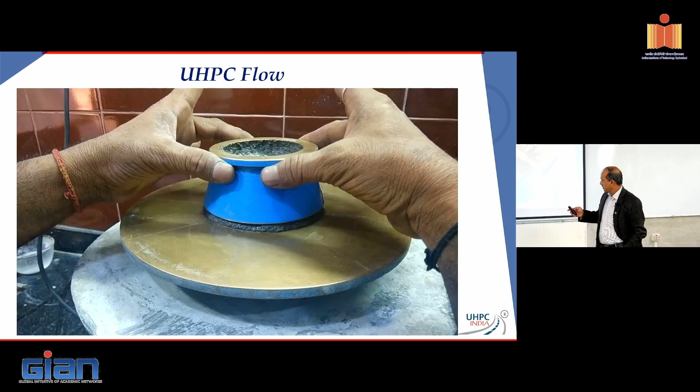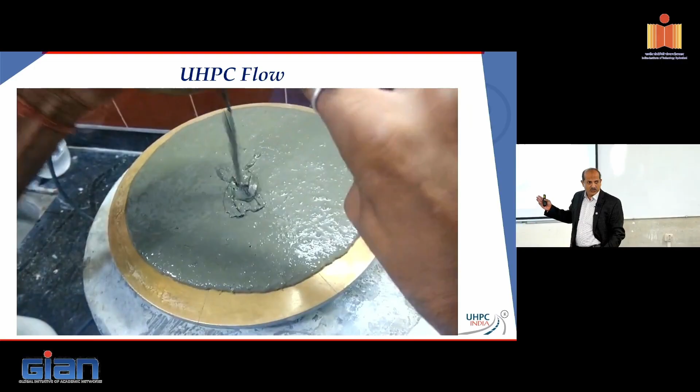And so it's a mortar. I don't like to call it concrete, although UHPC is ultra high performance concrete, but more or less it is a fibrous composite mortar. And that is what it is. And very, very flowable. I start this slide here showing a typical flow test on a UHPC. It can flow into any kind of mold, any shape that you desire, and it gives quite a bit of flexibility in that manner. You can see that over here, and this has fibers, an enormous amount of fibers. At least 2% by volume, which is about 156 kgs a cubic meter of very fine, microfine fibers in it. That's where it comes close to structural steel. It appears as liquid as it could be, and it could flow into any kind of system there is.

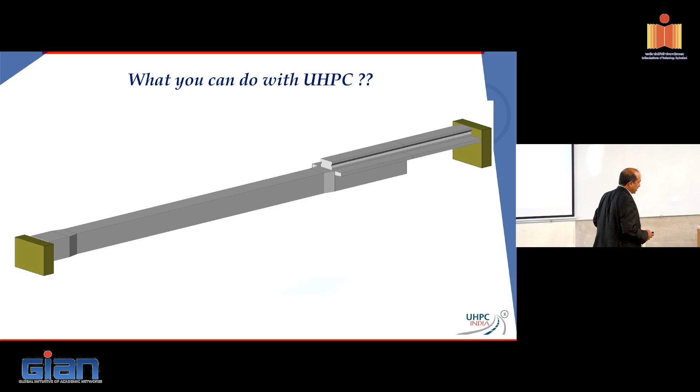I want to show you this shape. That is a beam, a 14-meter precast beam. This beam has come into that shape because of several architectural requirements and MEP requirements into a building project. I'll explore more into how we could solve this problem with UHPC, because we could come out with a section such as this. It had precast slabs as well, and I'll talk a little bit more about it later. I just wanted to impress upon the fact that while there are huge bridge girders made with UHPC today around the world, as sleek as a section this is for building purposes and long enough at 14 meters, how does this work? It could be made into this shape and size as it is. So we'll come to this, but that's the beauty we're talking about.

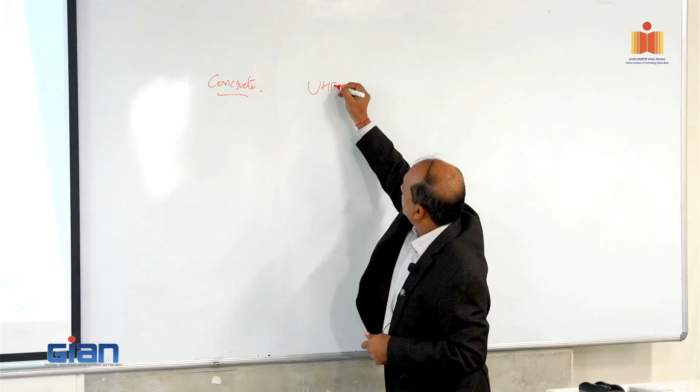If I take concrete and UHPC side by side, I'm going to put some numbers over here in terms of compressive strength: 50 MPa right there, and 150 MPa right there.

Typically, you would say I get two-thirds of my initial compressive strength, and I can do my post-tensioning or pre-stressing, I can release my pre-stressing. So I'll put some numbers over here. Initial, at the jacking force, you need about 30 MPa right there. Here, to take advantage of...

UHPC gains early strength, so in 3 days or so you would have 100 MPa right over there. And when you have this, your initial pre-stressing stress that you put is probably about 60% at max. So if you put 0.6 of this FCK, you're limited to about 18 MPa at the initial phase. Whereas 0.6 of UHPC is 60 MPa.

So you realize that you can put additional pre-stressing into UHPC. Of course, there are other areas to be looked at in terms of design, but you could go high in terms of initial stress, and therefore you could go longer, leaner as well. That's why I mentioned pre-stressing is a great friend of UHPC when it comes to long span construction.

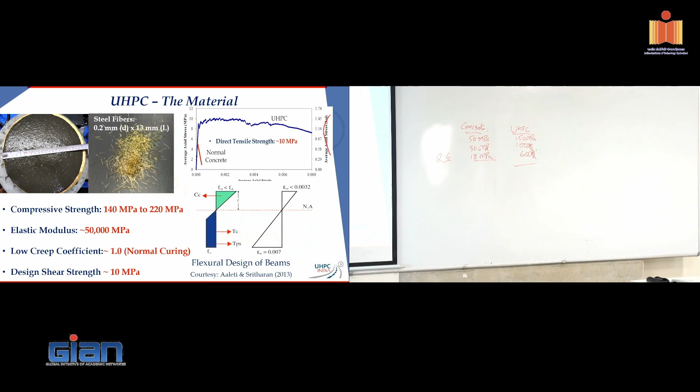So this is where the advantage in flexural members comes in. When it comes to pure compression members such as a column, it's a very direct advantage in terms of what you can use. You have a 50 MPa column versus a 150 MPa column, you're going to get a reduction in size, and there's nothing else to look at. So that's a very direct advantage.

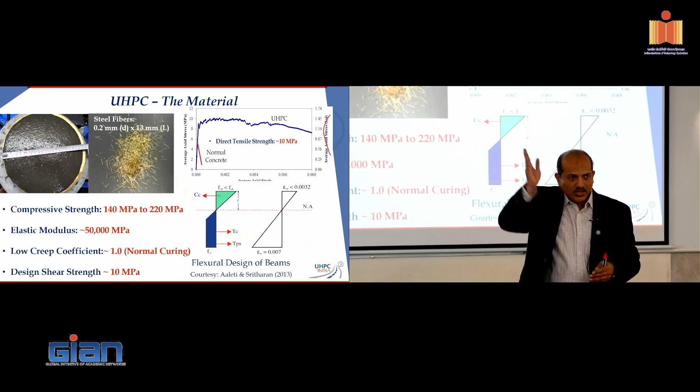Elastic modulus is generally high. It's not following the same route as concrete because it doesn't have coarse aggregate. At some point, you're going to be right over there in typical construction level UHPC. Now, when I say that, that number is not limited to that. There are some special purpose UHPCs out there that can reach 75 GPa or 80 GPa in terms of elastic modulus, but those are not typically used in construction.

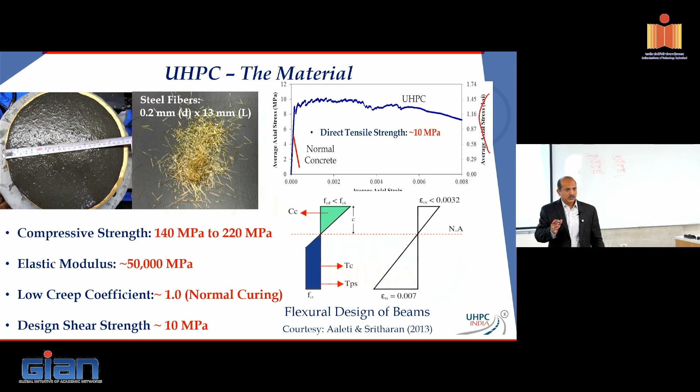Your creep itself is lower because the way UHPC is designed as a mix, your particle packing is really, really tight. That is one of the fundamental bases of UHPC. Apart from good quality raw materials and all, the one big fundamental of UHPC is your particle packing has to be so tight that your voids are lower.

And so your creep automatically goes down. With normal curing, you're probably going to be at a creep coefficient of 1 or 1.1 as compared to 2 or 2.2, which is there for concrete. If you go ahead and steam cure your UHPC for 48 hours at 90 degrees Celsius, it is possible to reach numbers as low as 0.2, 0.3. That's getting to almost nothing, and it's pretty much acting like structural steel.

So that is an advantage you can get out of steam curing, but then steam curing is expensive as well, you're putting in energy. In today's world of sustainability, green, low carbon, and all of that, putting 48 hours of energy into UHPC steam curing kind of works against that, although it helps in certain manners. 90 degrees centigrade is pretty high out there.

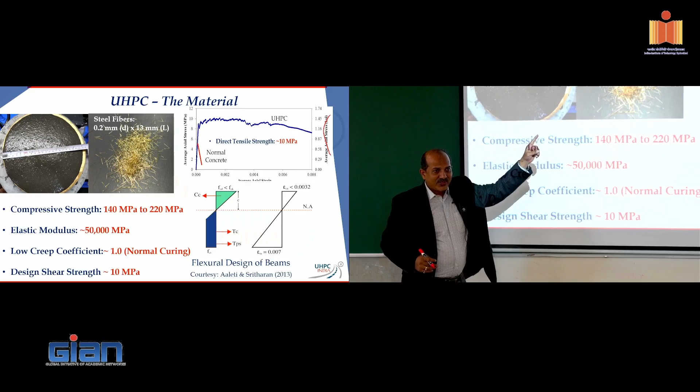And the same strain hardening behavior that you see right at the top over there helps in improvising the shear behavior tremendously, even without rebar. Now, if you look at your concrete code with concrete plus rebar, your tau C max is about 4 MPa. But here, if you look at it, just the design shear strength out of fibrous UHPC is right at about 10 MPa.

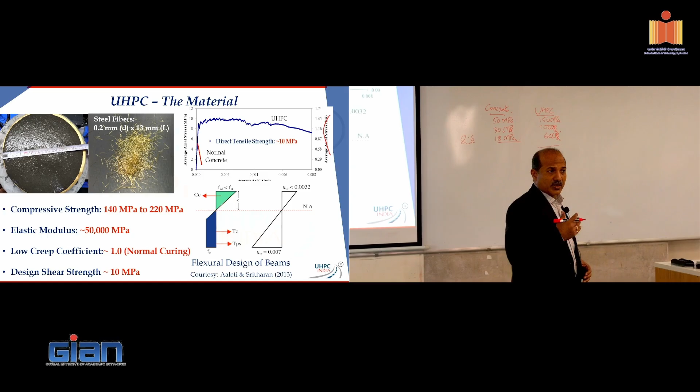So you can have more going for it, you can get 2.5 to 3 times the shear capacity out of that. And that is why, if I go back to the previous slide, I can carve out the rectangle so that all you need is a small web in between, and that is where your flexural members out of UHPC become way, way lighter.

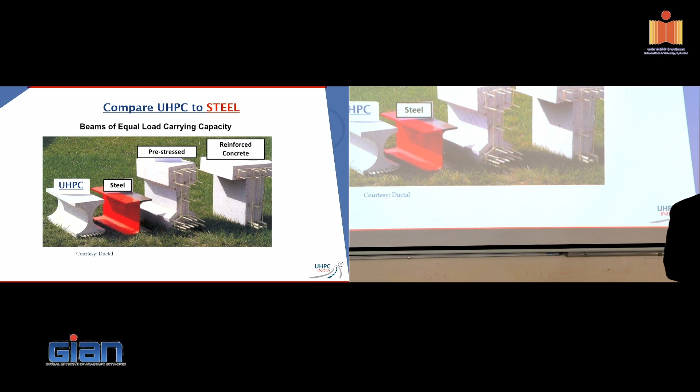I hope at least this slide, by all accounts, is clear.

For structural designers, one more thing: your compression curve is no longer parabolic. It's pretty much more or less triangular in nature, and the way you design a continuous UHPC member is a little bit on the reverse side. When you design concrete, you start right from the concrete strain of 0.0035, and then calculate the strain in your rebar or pre-stressing and go ahead with it.

In UHPC, what you do is work your way up to the strain localization point. Although here I've stated 0.007 — those were the early days. The 0.007, nowadays, for the last couple of years, I've seen this number being reduced to 0.005. But you start from here and do your calculations backwards.

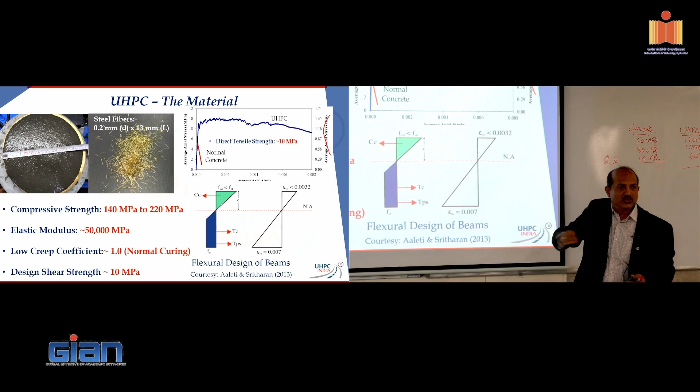So that is why you're using a full stress block of UHPC below your neutral axis. Your design starts from here, and then you figure out. Therefore, I've said strain less than 0.0032 — it is not equal to 0.0035, right? So that's the philosophy right there in terms of what UHPC is all about.

And that is why you can get sleeker members, and because it is flowable, you can put it in any kind of shape that you want. Because today with computer programs, you can analyze any kind of shape. It's very easy — not that you cannot do it by hand, but hand could take a lot of time. You can come up with a variety of shapes and do your analysis pretty fast. You do a section analysis, and your results come out very, very fast.

After all those years, this curve has been there for a long, long time. Then we saw a similar curve. I was at IIT Roorkee and saw a very similar curve, which was pretty straight. You did the test for us — Dr. Sri Prakash here did the test for us 3 years back, maybe 4 years back. It was also pretty straight in that sense.

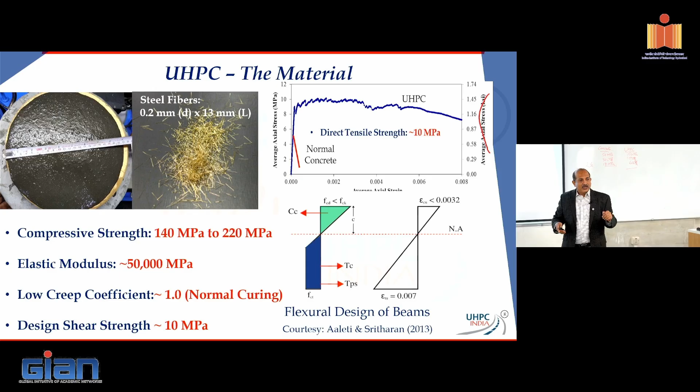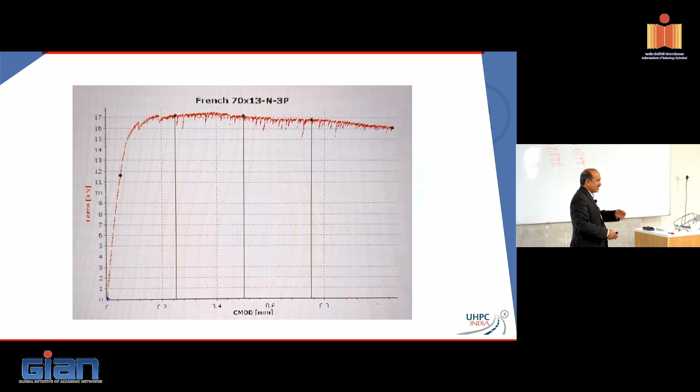Now we have a nice displacement-based machine that's been set up, so I just thought I would do a test out there. This is per the French code, and you can see we are getting a very straight behavior out of it also. At least there are 3 or 4 examples back at Iowa State University. All the tests done with 2% fibers are pretty straight, rather than having an increasing strain hardening curve. So these are multiple confirmations that with 2% steel fibers, you are pretty much almost flat on your curve right there.

So what happens if you just have 1% steel fibers? With 1% steel fibers, I think it's going to be more like a strain softening curve rather than strain hardening. Your strain localization happens pretty fast. I don't know what's your take on it — that's what I've seen. Yeah, well, you need to have at least 1.5–2%, then only you get that hardening behavior.

On durability, what happens to corrosion? Because the material is so tight, the particle packing is so tight, it's automatically protected — that's why it's called ultra-high performance concrete and not ultra-high strength concrete. If it was just about strength, we'd have just called it ultra-high strength concrete. But when you look at oxygen permeability, chloride ion penetration, reinforcement corrosion rate, or carbonation rate, comparing concrete versus high-performance concrete versus UHPC — UHPC is here in blue, and it's next to nothing.

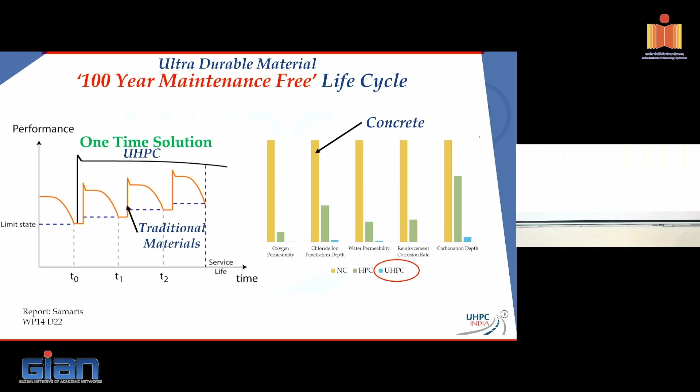I think there are three or four parameters. The first is strength - minimum compressive strength, which different codes define at different times, but strength of 120 is generally accepted. The second is flowability - we do a mini flow test, it should flow with no external compaction required. The third is the durability requirement, typically measured in terms of RCPT. And the fourth, I would add, is the post-peak tensile property, the strain hardening behavior, typically 5.5 or 6. So these are the key differentiators as far as the material is concerned - it's more a mortar than a concrete in that sense.

So I would now like to take you to the first UHPC project in India and how that came up. I had worked with a cable company some 10-12 years back, so I was able to interact with their managing director quite a bit. It so happens that at least in India, people know of ISKCON - they are big donors to ISKCON and are associated with them.

One fine day, while we were actually looking for projects in UHPC - now that the material was developed and everything was done, and we were trying to get our first project - I got a call out of the blue: 'Satish, we have a case where the building is up, it's G+2, for ISKCON, we are doing a training center in a tribal area. It's a G+2 building, the terrace, the last floor - we do not want internal columns. Instead of 7 meters, we want 14 meter spans.'

I said, okay, I have an idea what I could do for you. So I met him the next day, and this was part of a bigger structure, but they had these internal small columns. We cannot structurally justify this - there was somebody involved, a structural engineer, at some level on the interior areas. But these columns were removed, and what we did is we placed these 14 meter UHPC beams.

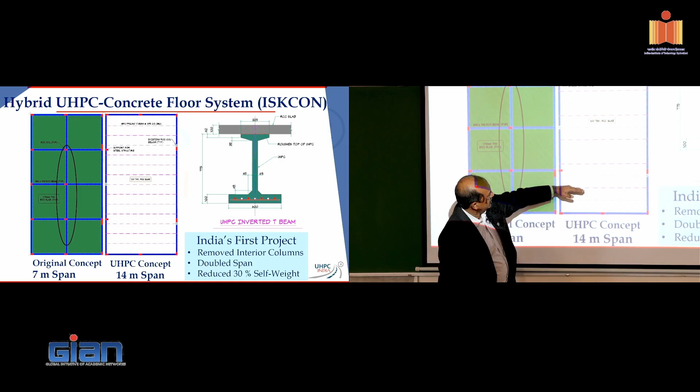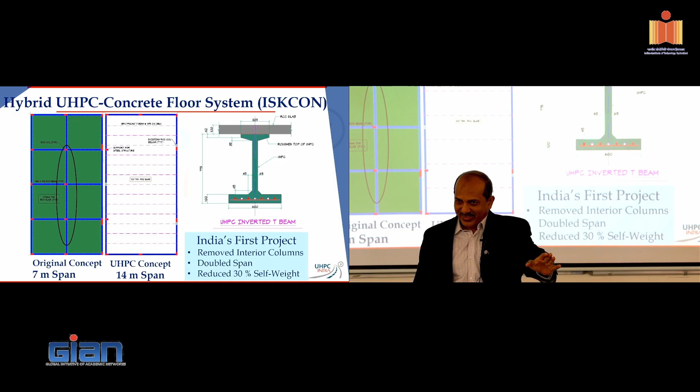They were extremely thin, unbonded post-tensioned beams, with about 3 strands in there. Since this was the first time we were doing something like that, we additionally put in 4 rebars as well, just for safety purposes, nothing more than that. We had enough capacity in there, but we didn't want to take any chance, so we added 4 rebars and had a very thin web - this green thing is what you see.

Now, they decided they were going to do a cast-in-place slab at that point. We said, fine, it's a good step - you're getting what you need, I can give you a 14 meter clear span. And that is how this started.

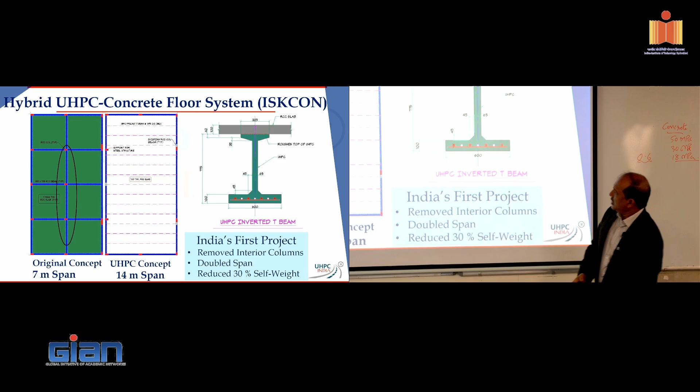So even after doing that, with the slab and these beams, the overall reduction on these columns compared to the original design was 30% - we reduced the loads from what was supposed to be with the 7 meter spans. There were just about 13 or 14 beams that were cast. Let me show you some pictures of it.

We did some other interesting stuff with it - those are the UHPC beams up there. I'll show you something interesting we did. Now, the major thing was, what do we do with the encapsulation of the anchors right over there?

We said, okay, we're going to try two tricks. Number one, we got everything highly galvanized - the barrel anchor and other components. Second, we opened up this end right over here, and this entire region was poured again with UHPC, because UHPC is a highly durable material as such - this is the extra protection we provided. So we did not use any grout for closing up the stressing end, but used UHPC to close up that end.

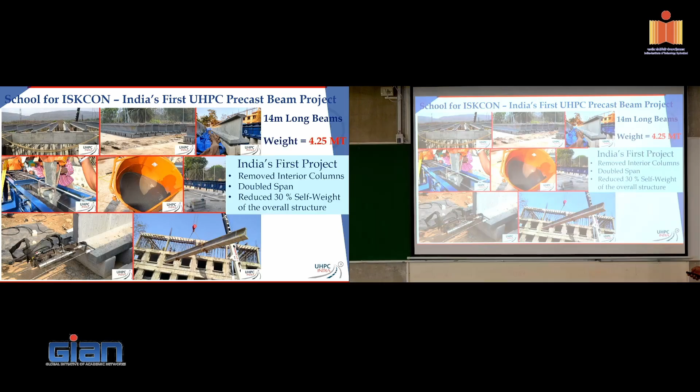So you can see the formwork right over there. This was precast on the site itself, and then was lifted up as you see. Weight of the members was just about 4.25 metric tons each.

I just want to show you, because this is for memories, this is India's very first beam that is being casted in UHPC. So I keep this video all the time, the very, very first one.

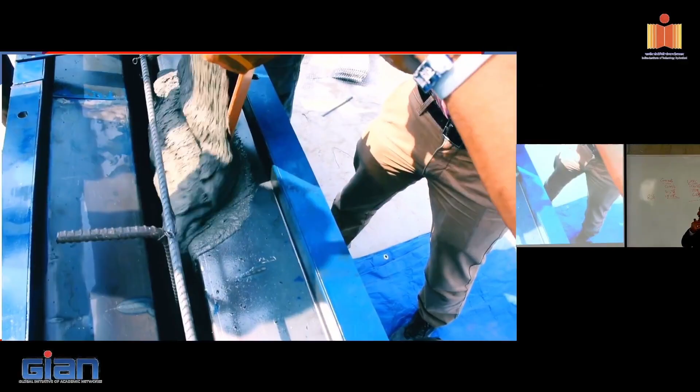You can see that material is flowing. What were the challenges? We were working in a 40 degrees temperature environment outside. That was the biggest challenge.

The first time we mixed UHPC outside, we immediately figured out that we need to take control. Although we were mixing ice and everything, it was fully iced, but we learned a trick immediately: before we start the mixer, we should cool down the mixer by putting ice in it, just ice. You run it for 5-10 minutes with quite a bit of ice, cool down the mixer in that environment, and then start mixing UHPC. It's going to have a very positive effect. So that is something we learned from the site, doing the first project in a 40 degrees centigrade environment.

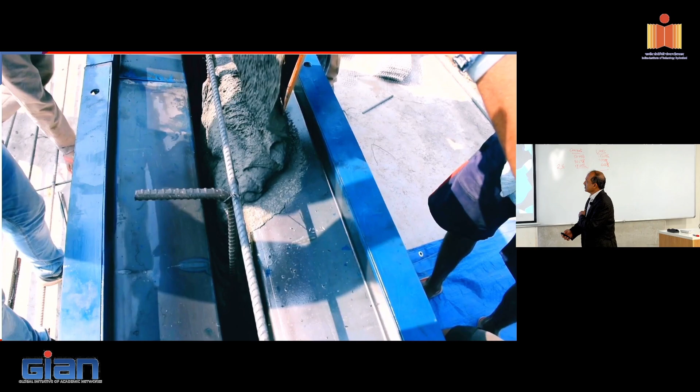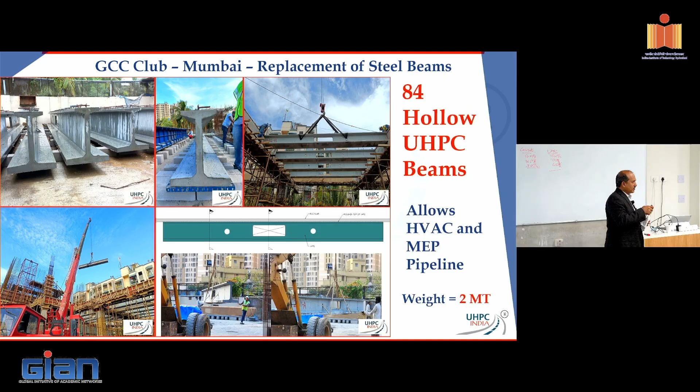Right there, if you could see it in the picture, there was an access hole provided for stressing it. But you were able to pump UHPC? Yeah, so we created a little formwork that could attach and we could pour UHPC in there. And this is unbonded post-tensioning. Yes.

Just because I've worked so much in the US and have designed a lot of unbonded PT for multi-story buildings, there's a comfort level in designing unbonded. There was no problem in anchorage, no bursting or any issue, nothing happened.

I was so nervous, that was the first UHPC beam being done with such a thin flange. I know what care we took when the first one was being done. I was standing nearby and was extremely nervous what was going to happen. So we did 50% stressing first, then went back and did the rest of the 50% stressing. Nothing happened, all the beams went well.

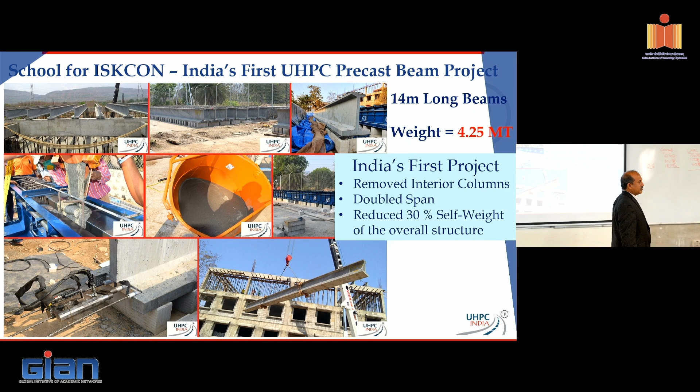Did you also use mechanical anchors, or just the UHPC? Mechanical anchors plus the UHPC. The reason Professor Sri is asking that question is my entire PhD work is on UHPC anchorages without the use of mechanical anchors. But yeah, we use the mechanical anchors right over here too.

So this one was deeper, about 775, it was thin and deep. We didn't have any constraints with respect to that. We could come out thinner and deeper, or shallower and wider. It really depends on what is acceptable on the site, what works, what's most efficient, economical, and what the parameters are.

Could we have done that in 600 mm? Probably yes, we probably would have had to put more post-tensioning in it, and this would probably have been thicker. The web might have been slightly wider than what we had. So it's just a matter of what is more pertinent to that particular project at that particular time. Okay.

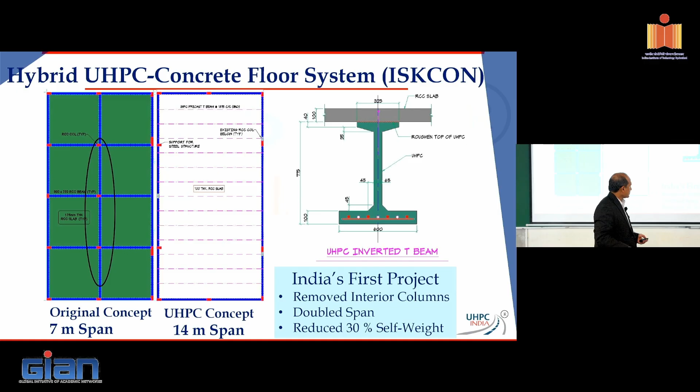So for curing, as I mentioned, steam curing is one way. Last model, what's the significance of that hollow portion? Oh, that was for AC ducts to go through. So when they have the ceiling, they don't have to put the air conditioning ducts below the beams, which eats up more space. It went through that, and the ceiling is right along the bottom flange.

Do we get any design advantage with that hollow? Usually at the center, the shear is almost zero, that's why we were able to do that right at the center point. Plus it's a little bit wider, that was a concern, therefore we ran some nonlinear failure analyses also to check it out, what behavior we are getting from it.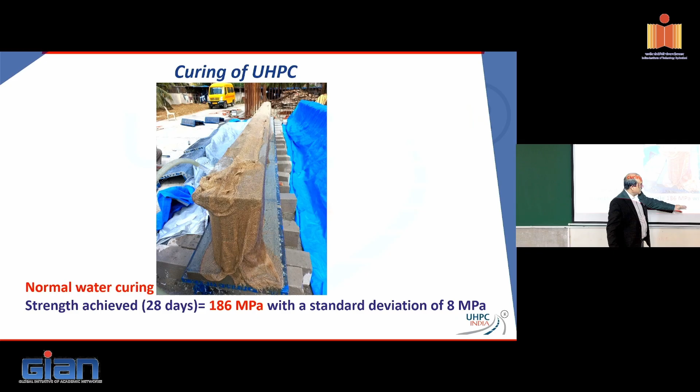But like I mentioned, you can do water curing. I'll tell you, this is with water curing, about 84 members cast over 30 days time. The mean strength was about 186 MPa on site, with a standard deviation of about 8 MPa. That is what we achieved.

Whenever you are measuring these strengths, are you using standard cubes or 100mm cubes? 100mm cubes, yes, smaller cubes.

Sir, why do we have a higher standard deviation? Does that depend on the strength of the concrete? Yeah, with normal concrete you might not want to see an 8 MPa standard deviation, but when you're talking of strengths in the range of 150 to 200 MPa, that number is not big, given all the material is getting homogeneous.

So why do we expect as much? See, there are other parameters, it's probably not just about the materials. Even if you get the best IS molds out there, there are so many situations on site, how the person is putting things in there. Are you getting a perfectly 90 degree angle on the cube? Are all your levels of the cube really flush, that you don't need to grind anything at all? So there are certain other parameters that come into place, and so those standard deviations are going to be slightly off.

If you want to develop a mix for 120, 150, 180 or 200, are there any standard ranges or standard deviation I have to use? I think we are putting a number in the IRC right now. From whatever I'm collecting from Satyasilan and other data, the standard deviation is anywhere from 5 to 8. But the French code asks you to take like 10 megapascal characteristic, because you can easily reach that 9, 10.

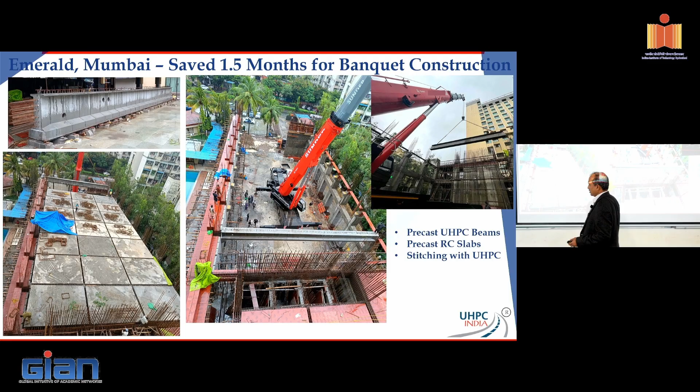Now this is another project. I'm just trying to show you what things are possible. There's another project about a 16-meter UHPC beam, but the beauty here was to construct it faster. This was about 10 meters high, so how to push construction on site. RC panels of about 4 meters by 5 meters were cast and put on top.

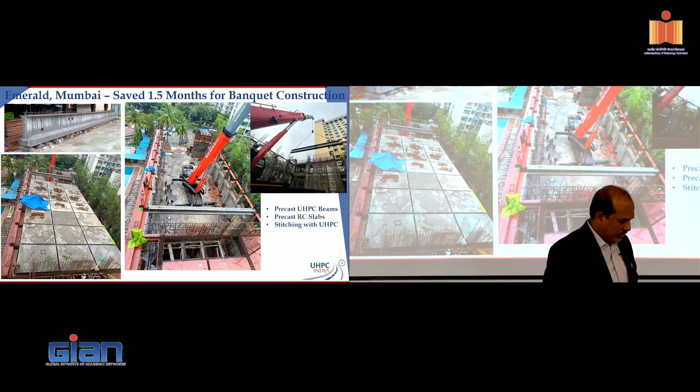Now, stitching with UHPC, I'm going to spend some time on it again. The beams were first placed, and then these panels were placed. The girders are right over here, the girders are right over there. Then UHPC was poured into these joints and all the connections were done. The project was able to move forward really fast in that sense.

So I don't like to claim it like that, but I still put this. We're trying to do a building in Mumbai. It's about 220 meters high right there, and it's currently about 8 or 9 levels up. But we're trying to see, I'll tell you what we have tried to achieve with UHPC.

Number one, I made a statement that you don't want to do a full building with UHPC. It's not going to be economically viable. We wanted to find out where UHPC is going to help, if it is going to add any value to the project.

So the total amount of UHPC on this project, in terms of overall concrete volume, is just about 12%. That is where the break even on the costing was for the building as well. The entire UHPC is just about 12% of the total concrete, including the foundation and the basement walls and everything else.

Now this is a commercial building, about 2 basements plus 56 stories, so about 58 stories high. To the top of the terrace is about 210 meters, with another 8-10 meters above that for architectural elements. It's a hybrid construction, so the core walls are cast in place going up, whereas the floor system is a precast system.

One more thing to understand is these are all pre-tensioned slabs - precast, pre-tensioned slabs which we are stitching together with UHPC. Generally when you do a precast building, like a hollow core building, you have the hollow core units butting against each other, and therefore you need a screed over it of about 3 inches to create a continuous diaphragm system that connects through all the shear walls, etc.

By doing this joint, we were able to avoid that 3 inches of screed because you have a monolithic construction in place and the diaphragm automatically gets created. So the load on the structure was reduced, and one additional floor placing, concrete placing activity throughout was taken off.

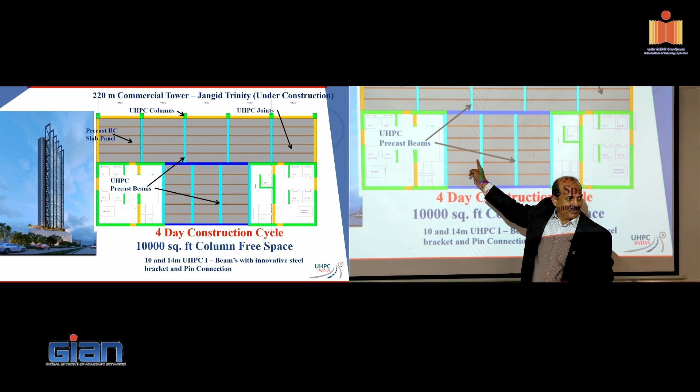Now let me show that beam again. You see some wings over here, right? Why was that necessary? Because we did not want to shore up the slabs. The slab needs to just sit on top of the beam, and if the slab sits on top of the beam, you're done basically, and that should work out.

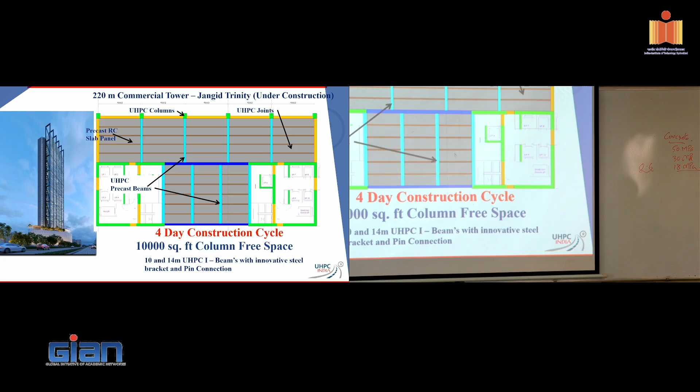We had a situation where if the slab sits on top of the beam, I would just have a beam of 100 mm, which is just not possible. I cannot have a slab of 200 mm and a beam of 100 mm - that is just not possible. So we needed to figure out a way to create connections out there.

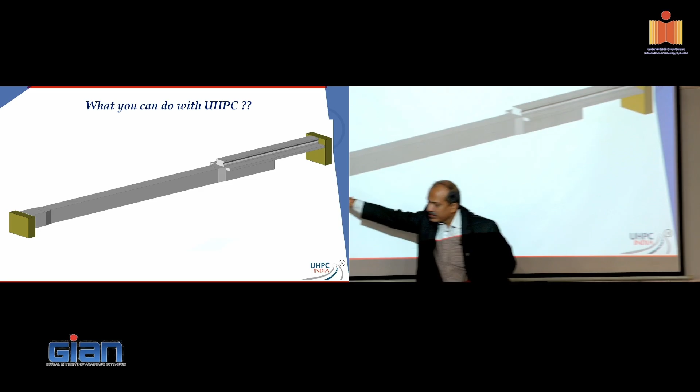So what we did - I'm going to show you sections starting here at the corridor area, then sections here, and right at the end. But before that, let me show you the design detailing of the beam, including the post-tension detailing that went into that particular design. I'll also show you the connection we did here at the far end - it was a pinned connection created with the beam out there.

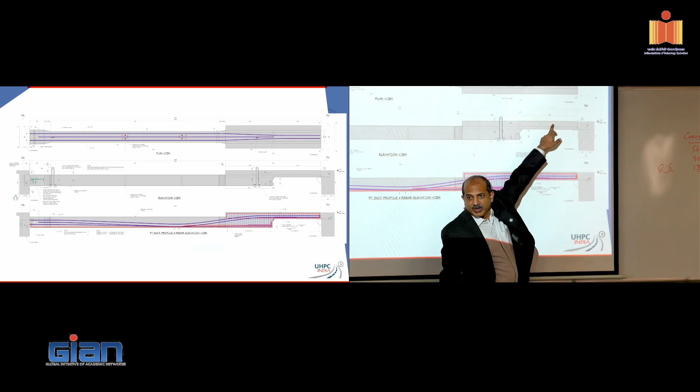We wanted to maintain the UHPC at 300 mm and not have the slab over there, although the slab still needed to be self-supported over the beam. So this is how it looked - that's a top plan, and these are both the side views over there.

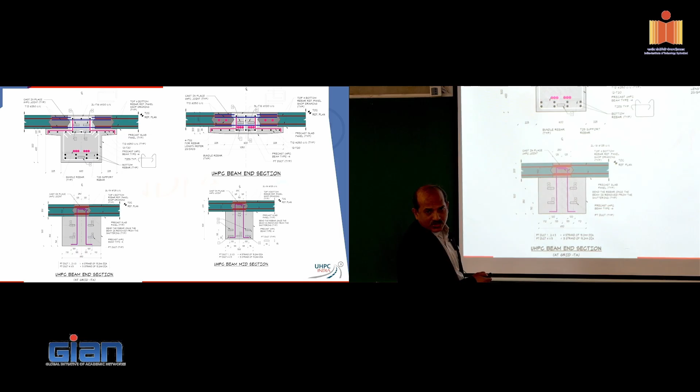That's at the corridor, so you see the wings over here. The slab comes and bears on the wings, and then you have a jointed connection right over there, with additional rebars etc. creating connections to the beam going right in. So this is a fully connected beam section to the cross beam over there.

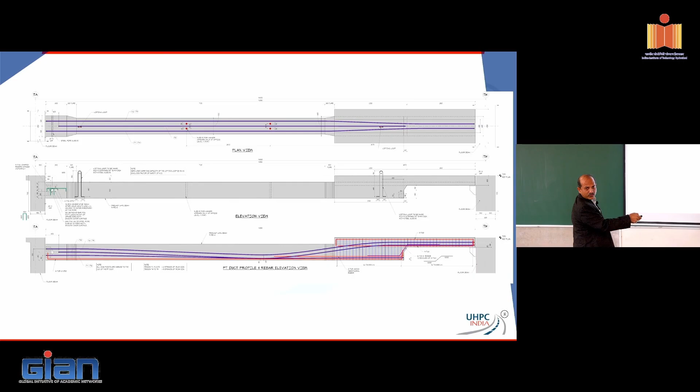This portion was extended out because we needed a transition zone over here. At that transition zone, the wings are still there - you still have the slabs bearing over the wings, and you have the stitch connection happening right there.

Then we move on to the most typical section inside, which is a 500 by 500 section right at the center, still stitch connected to the slabs. And right at the end, where the anchorages are, we needed a wider section - so you have this, with a similar connection right over there.

At the end of the day, we do not have to shore up any slabs in those areas, because that would cause a constructability challenge, and we do not want any constructability challenge. But there are times when you sit down and a project has to work like a team, so you have to accommodate all scenarios - whether it's the MEP, architecture, and the structure coming together.

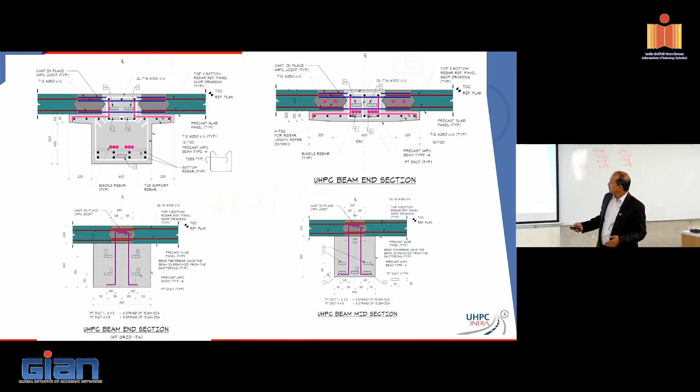At the far end where the pinned connection was, let me come back to that. This pinned connection right at that end is designed with a steel embed plate with headed studs inside the beam. There are some detailings of how that went about.

As the building is getting constructed, we have these at some other locations as well, carrying along on that building. What I wanted to show with this is that with UHPC, there is a way to do things without dumping a column at every other point. It was very important for us not to introduce other gravity columns down the middle, because we wanted that gravity load to go to the core, since the building is slender, tall, and seeing a lot of wind force, with tensile stresses in the shear wall. We wanted as much gravity force as possible to go into the shear wall. We tried to do that.

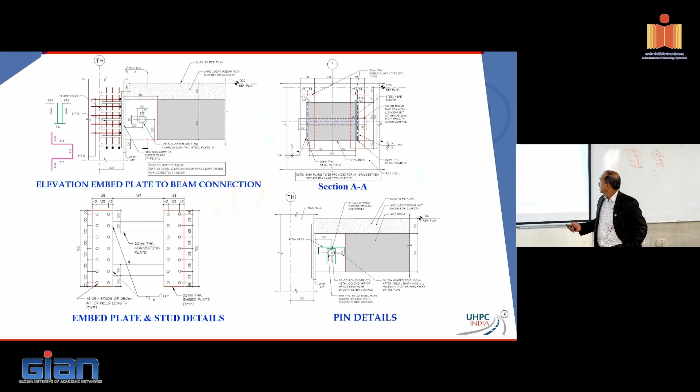But were you able to meet the tolerances? Because even in steel, the embedded plate is especially particular. So we kept tolerances on the sizes of the embed plates and headed studs, so that most of the time you don't get complaints that they're not matching. We kept decent tolerances out there, knowing upfront that these kinds of challenges were going to come, so good amounts of tolerance were provided in those connections.

I would like to show this. This is something typical you've seen, but also with the shear walls, we were able to provide a stitch connection right at the end with the shear walls. This is the slab to shear wall connections.

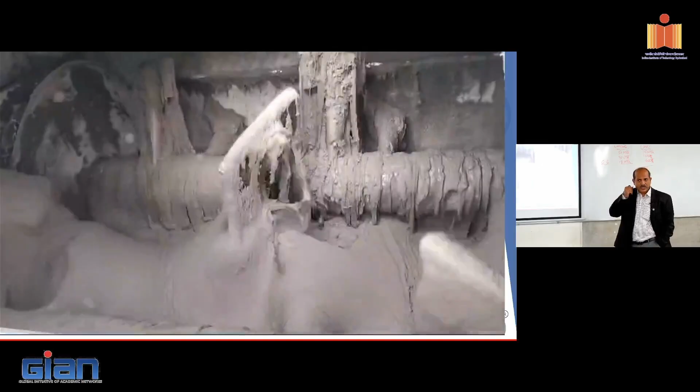I'll come to the connections, but before that, I want to show there is a nice 3 cubic meter twin shaft mixer on site in which UHPC is made and delivered, whether cast in place or to the precast formwork. This is casting of one of the rectangular beams, sideways, but you can see the flowability of the UHPC, so you do not need to vibrate.

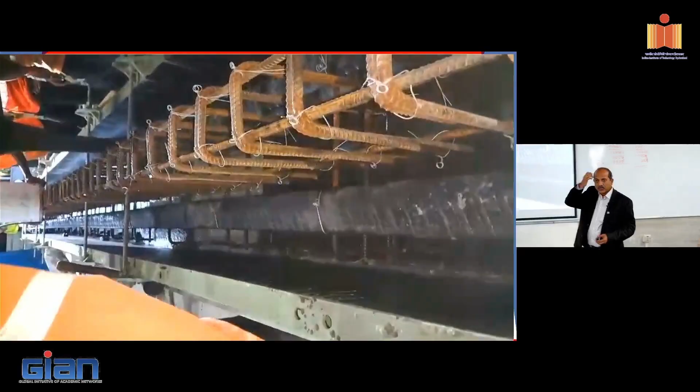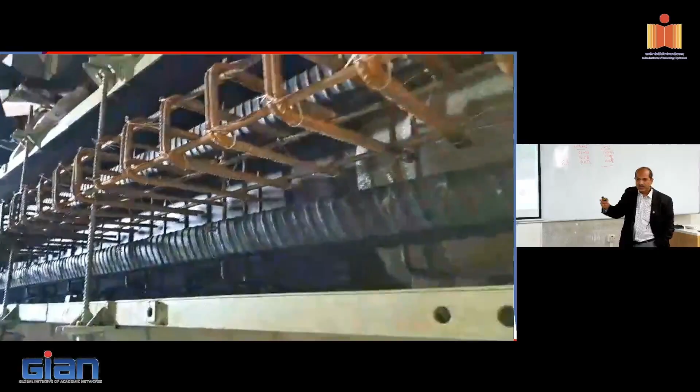Now the question comes, what happens if I do vibrate? I generally say please do not vibrate. If you want to do some hammering, just touch and go from the outside, that's fine, but if you do continuous vibration, there's a tendency for the steel fibers to align in one direction. You want the steel fibers to be randomly distributed, so there's no point in vibrating. You can see here the UHPC is just flowing inside the formwork, so you don't need to do any vibration at all.

Now these are the precast slabs out on the project. A complete precasting, or pre-tensioning, system has been put into place. That's one of the 14-meter rectangular beams on site, hanging. This is the 19-meter beam.

All right, Dr. Shri, yeah. Hope to catch up with you soon. Yeah.

So I mentioned about the concrete beams that were in 3 pieces, because it's not like a bridge project where you have a mega crane that can come in. Building projects have limitations on crane capacities and sizes, especially when going that tall, so we needed to work within those limits.

We have the stitching done in these zones out there. Was there any additional post-tensioning? There was post-tensioning in this, yes. It's like a segmental construction, 3 segments, but fully stitched together, and then on top of it there is post-tensioning, yes.

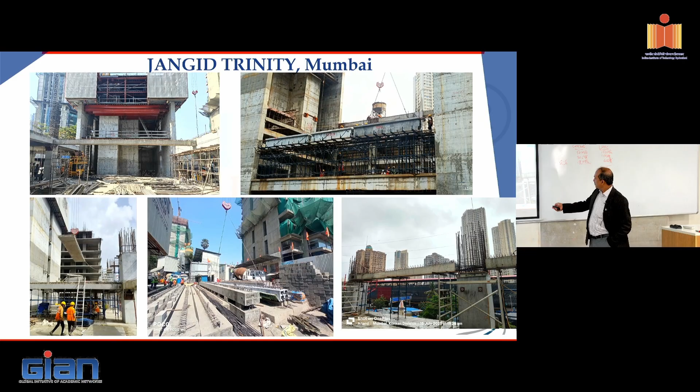And it's a very tight site. Our site is here, there's another building going on there, at least 5 or 6 buildings happening right in the vicinity of each other. You can see the UHPC beams are just dumped right next to each other in that area. These are UHPC columns, by the way, out there.

So you can see the joint being poured over there on the left side. This has nothing to do with UHPC, but you can see the UHPC columns over here, and in the background there's this self-climbing formwork that is going up in the tower.

Now to connections. That's another famous photograph from an FHWA publication about UHPC connections.

Now typically, when you design regular concrete and you're providing your development length or lap lengths, what is the typical length you provide? Somewhere from 35 to 50 times the diameter, depending on the strength of the concrete. But with UHPC, you hardly hear that number. This 15D number comes from the Swiss recommendations. If you look at the FHWA tests done on direct tension of rebar, they have prescribed, and even AASHTO has prescribed, AASHTO recommendations now prescribe 10 times the diameter.

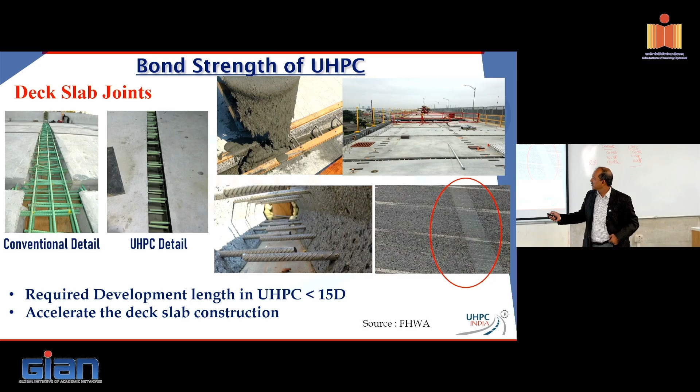The Swiss say 15, so we go with 15. Here you can see these are concrete panels over a bridge, and the girder below is actually a steel girder. You have all these UHPC connections to the steel girder and panel to panel. The difference is quite obvious when you do a concrete stitching - you have to develop all your rebar, you need wider stitches, versus a UHPC stitch which is quite lean and thin, so you can make that happen.

Coming to this morning's presentation about connections at the foundations - I didn't have this slide originally, I just put it in during the presentation because I was hearing about connections at the foundations with precast, so I pulled it out right then. This is also a well-tested UHPC connection. This is a pile cap or foundation where ducts have been left out. You pour UHPC into the ducts. You have rebar coming into that foundation, into that duct, and you have your pier or column, or wall, whatever you may call it, and you just insert it into it. That's the simplest connection happening inside the foundation, without the need for grouted couplers or direct couplers.

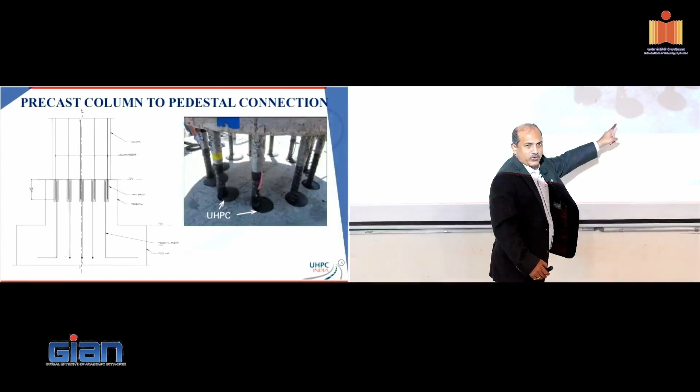How would you rate UHPC with respect to the conventional grouts being used, in terms of workability? Great question, because when we mention grout, this is still UHPC, it's not a grout - this is a flowable UHPC. Even in marine applications, what we use is slightly more flowable, but it is not like a grout.

We are currently in-house working on a UHPC grout that flows more like conventional grouts, that can go into ducts and pre-stressing ducts. Hopefully in the next 2 to 3 months we should have that available. With more flow, the development length requirement reduces, and also the durability will be better.

So this is a well-tested connection back in the US, and I thought I would put that in this morning just to showcase something different.

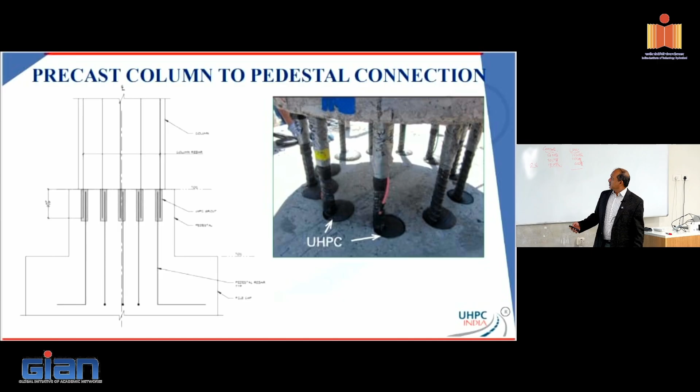Do you have any additional confinement as well, close to where you have the sleeves? I don't think there was anything there - from what I remember reading in the literature, there was nothing else. So the sleeve acts like confinement anywhere - whenever there's an attempt to pull it out, it cracks and forms, acting like confinement.

There's another example I would showcase. This is something we did at the bearing pedestals over the top of the metro projects for Tata projects in Mumbai very recently, where they asked us for UHPC and we were able to provide it. This is right at the bearing plates, right below where UHPC was provided.

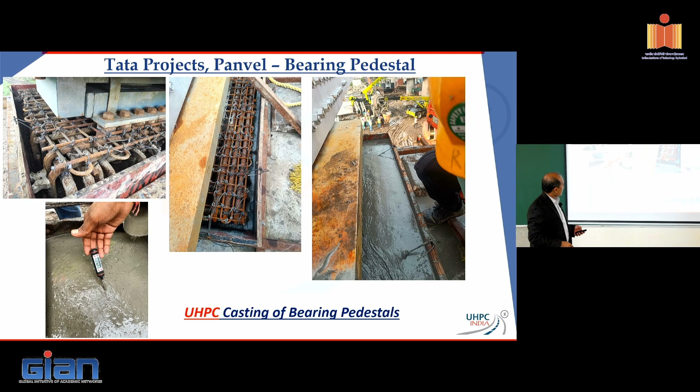You see, compared to this dense reinforcement, conventional concrete is not possible. Not possible. Plus, that dense reinforcement was probably not needed with UHPC, but they had everything in place already. The call came: can you provide us UHPC? Okay, when do you need it? Can you provide it tomorrow morning? We want to cast. So it was that fast.

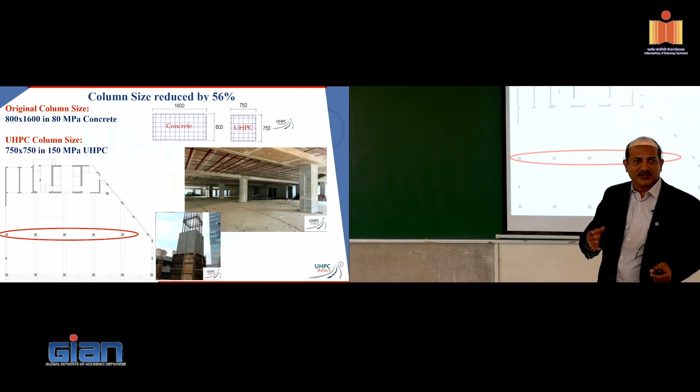Sorry to put in a cast-in-place element over here, but I just wanted to showcase that when I said UHPC is never going to replace concrete. I think that's a misinformation out there, that UHPC can completely replace concrete or structural steel. It has its own place as a material. That is where it's going to be used.

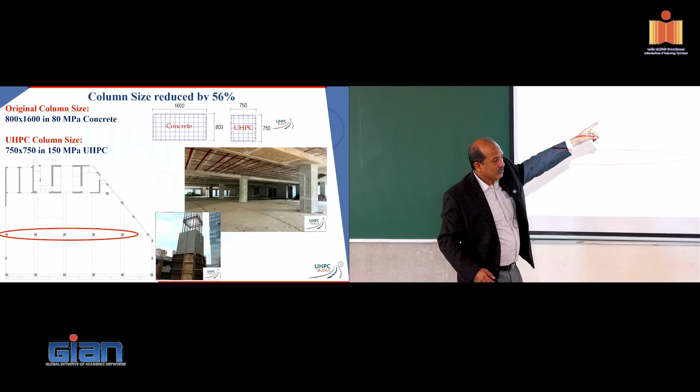So in this particular project, this was a departmental store, and going up, these center columns, which were predominantly gravity-oriented columns only, in M80 grade concrete, they were coming out to be 1600 by 800. So those, we got replaced with UHPC at 750 by 750. That is where in a departmental store, the space efficiency comes up. So even in precast, something like that could be looked at. And yeah, that's the column out there.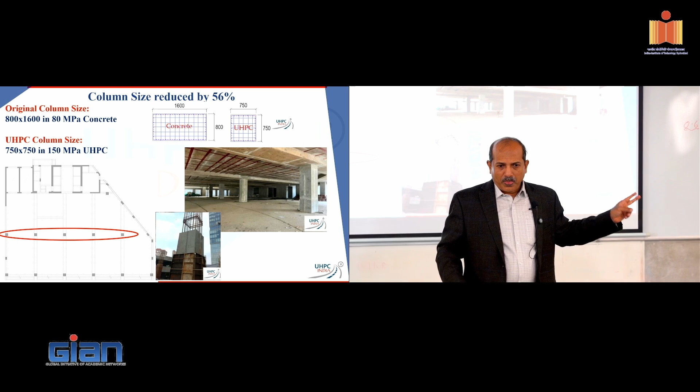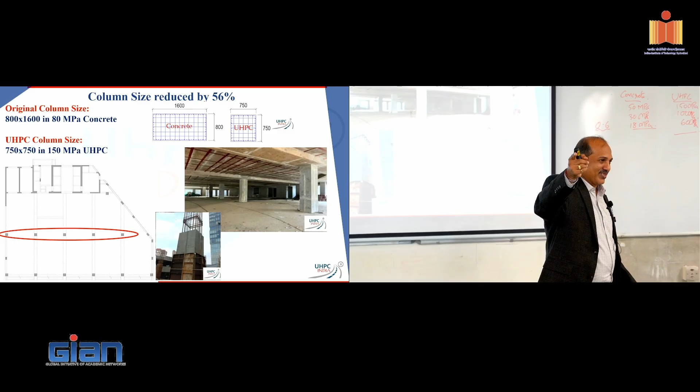In fact, I don't have two photographs over here, I just forgot to ask. Right next to this particular building, we did a precast swimming pool between two towers at 70 meters high, and a precast walkway between two towers at 70 meters. That would have been nice to show. I will try to pass on some pictures that are completed. This was in Mumbai, Bombay, in the Chembur area.

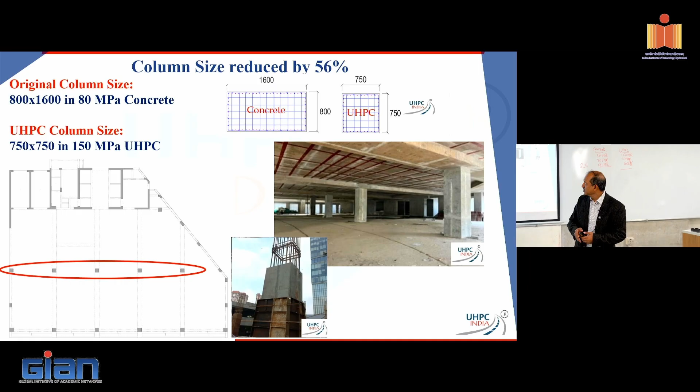This fancy swimming pool at a rooftop, isn't it creating other problems? Other problems are there, so bearings, those kind of seismic bearings etc. were provided at the ends. I know this has become a fashion these days, but yeah, those are troubles in seismic areas. So all the bearings were appropriately taken care of for that particular thing.

I do want to show this particular thing for one reason, that UHPC can be pumped. So even if you want to do some precasting or any other work at elevated levels, it's not something that cannot be done. Plus, there are a variety of projects where we have made UHPC out of a premix in a transit mixer itself, not any high energy mixer. So a transit mixer was used where a full premix just goes into a transit mixer and goes. But if there are any questions about UHPC not having retention, or whether it's pumpable, I think this particular video is going to help.

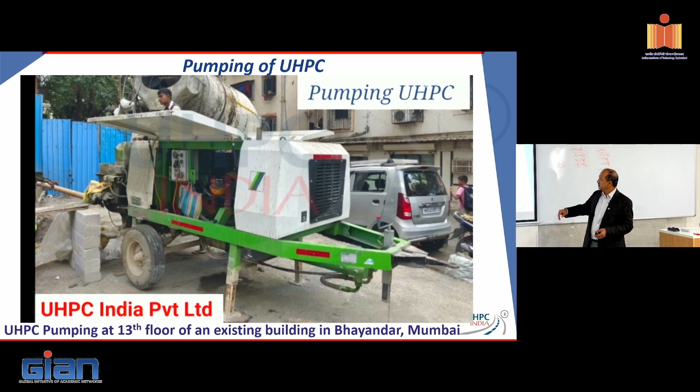And this was done for... you can see all those premix bags and transit mixers. There's a pump out there, and the UHPC is coming out of the TM into the pump.

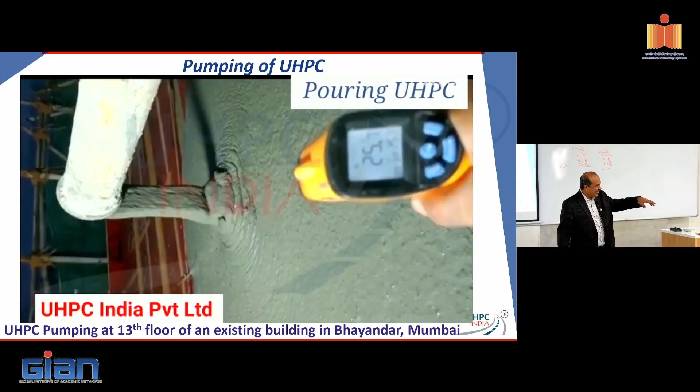So back in the US also, Steelike uses transit mixers to actually provide UHPC at joints and overlays. They do that, and even Ductal, after seeing Steelike, started that.

And you can see that coming out. This is about 60 meters high above the ground level, and you can see the consistency is there, there is no segregation or anything. So it is possible, even if you're doing bridge girders.

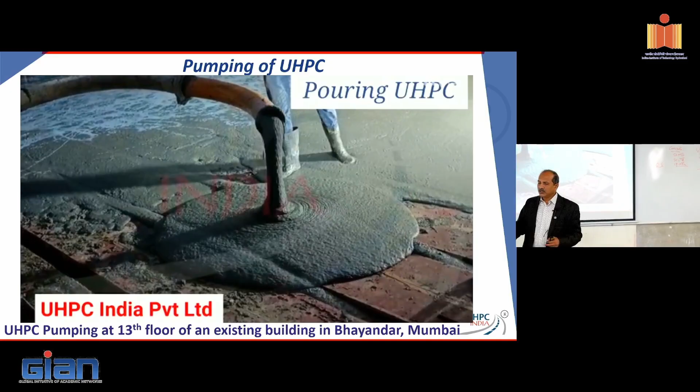Let's say it's a casting yard on a site, and your site plant is a bit away from where your formwork system is. So you can put a pump in and push UHPC into the formwork for your precasting purposes. Yesterday we had a presentation by Professor KVL Subramaniam on 3D printing - now these two can be nicely matched. In fact, there's quite a bit of scope for using UHPC in 3D printing.

Absolutely. I mean, just a couple of weeks back, I was in the southwest corner of Germany, where 3D printer manufacturers are there. And you could actually see that they are 3D printing against gravity. The mix that they had was really amazing, that you could work against gravity and print it and still keep going. It's really amazing.

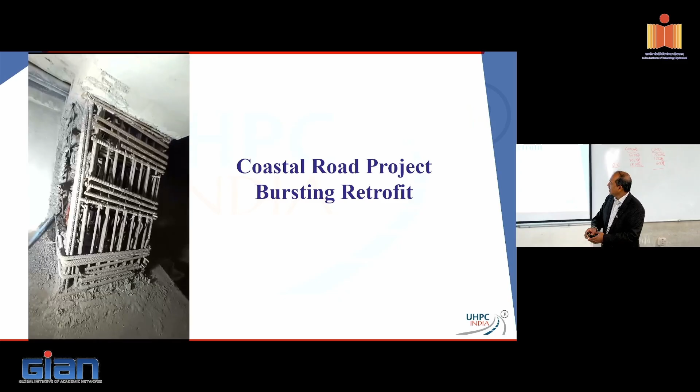I do want to show this - this is a precast segmental girder at the coastal road in Mumbai, which had a bursting at its anchorage. And exactly the same reason - too much rebar, how will concrete go into it? So you would have honeycomb problems. If you just look at this, this is after a lot of things were cut down, but you had an amazing amount of rebar in there. There's no way you could push concrete properly, and so they had bursting in that region. Not Atal Setu - the coastal road, right now, the new coastal road.

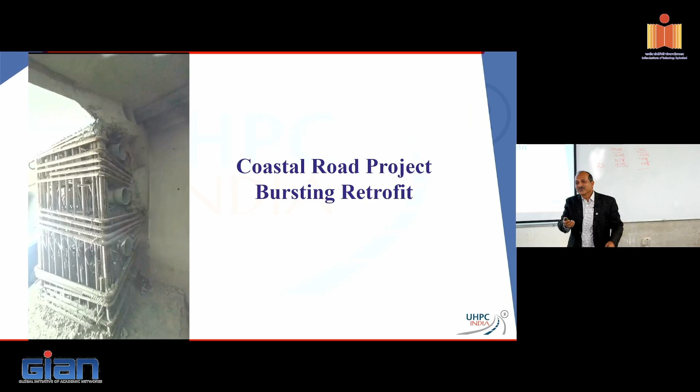So, Professor Meher Prasad called me up, actually, when this happened, and then...

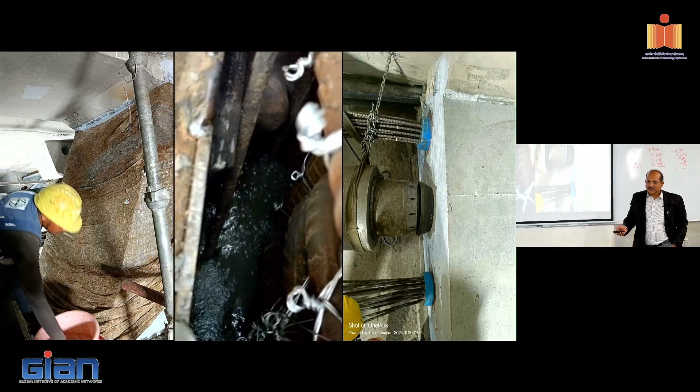You see the center slide, UHPC — everything was cleaned, and then UHPC was just poured. I think what you said, that originally they could have designed using UHPC, they could have reduced substantially on that.

Yes, they could have. So anchorage area, the UHPC goes extremely well. And again, the curing was done just with water right over there. A curing compound, a good curing compound, can also be poured. If you have a 90% plus efficiency curing compound, it will do its job pretty well. You don't have to do water curing.

And then at the end of the day, the UHPC repair work looked that way, and you could see that they had started stressing it out. So that worked well.

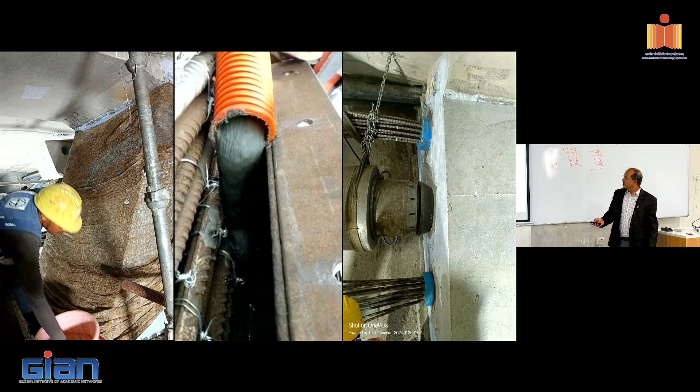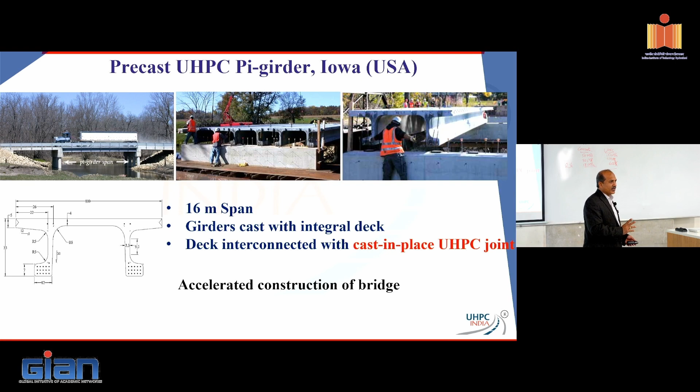The big advantage, of course, is that you're ready to go. There is no wearing course that needs to be put — you're just simply joining the pi girders. The cost efficiency comes into place over here. Technically, I think this is a wonderful piece of engineering right there.

And the other thing is, I think Josie, you're going to be working on, or you've started working on it? Just started working on it. This was something that Sriram Maleti and Dr. Sri worked on years back, and now they're picking it up to make it a lot more efficient. I think Josie is going to work on that as part of her master's program, right?

Wonderful. That means whatever advantages we get in a conventional waffle slab, say in a building, the same advantages we are trying to bring here. Yeah, this is a bridge — it reduces weight. Correct.

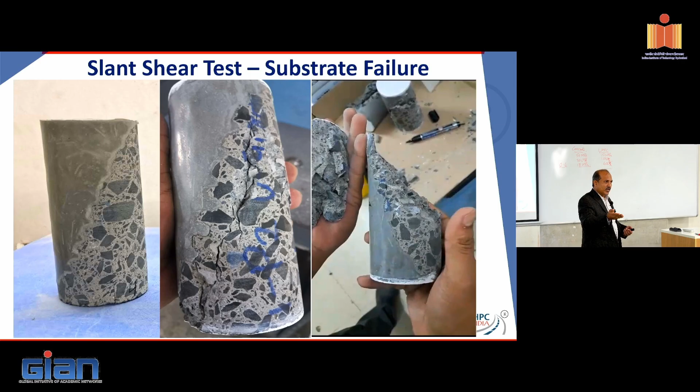That is what is really needed in terms of, even a single good machine would really help with all these overlay problems, because milling is not the best of the solutions on overlays. We have done milling, but even jackhammering is going to induce cracks which go inside. Milling can be done - if you want to take out 40 mm, the first 20 mm you take out with milling, and the rest 20 mm you take out with hydro demolition. It's a cost-effective way of doing it. But that's what we do.

Denmark has actually been most progressive. If you look at the history today, there could be opinions on who came first, but as far as history goes, Mr. Hans Henrik was one of the first ones to work on what we call today as UHPC, and he brought out that UHPC in 1978. He's a Dane. Was he a Dane? Was he Danish? Yes, he was a Dane.

Denmark has done everything, done and dusted, that we are trying to do today, 30 years back, not today. They did everything three decades back, what we are trying to do today.

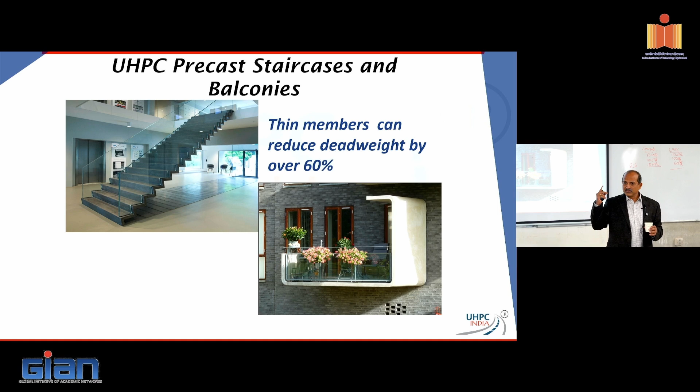But these kind of demands are going to come through, and I say that with conviction, because real estate prices are going up like anything. So developers are now bothering to put money into all the fancy items and everything. The market will automatically come.

That's what I wanted to say. We need to add value to the project. UHPC is for that purpose, solve problems, see what you can do against steel and all. There's a lot out to be done, and it can be done. We are finding our ways into segments we had never thought about. Every month there are at least a couple of calls, and we think, oh, these people are looking for UHPC for applications I had never thought about.

One day I walked into a sound and music exhibition, and I was talking at one of the stalls with one of the owners. He asked me, what are you working on? I said, well, we are working in UHPC. He said, hold on, Satish. You see this boombox? Earlier these were made out of wood and all of that. Now they are worldwide made out of UHPC because UHPC is acoustically great. I said, excellent, now I know something.

So we get demand for material for machine bases, machine foundations. I already mentioned marine, for security solutions where you're providing banking solutions and vaults and high impact solutions, those kind of things, for abrasion resistance, special abrasion resistant UHPCs. That's why deck resurfacing is getting popular because of vehicular abrasion. It is becoming better than conventional concrete.